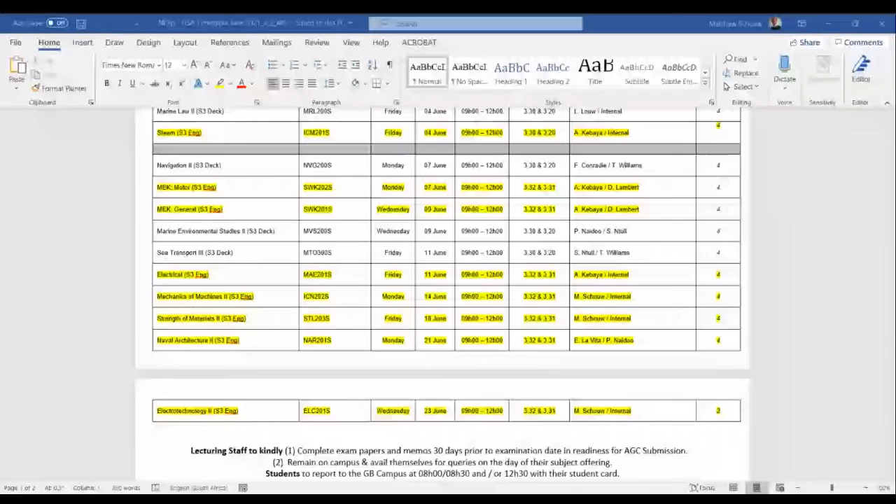Yes, sir, we get that. Prince? Okay. That's that, and then I just need to share my slides for our work today. Where are you? All right, here we go.

Okay, so have you guys been practicing shear force and bending moment diagrams? Have you guys been practicing? You're all writing next week on this chapter. How are you guys finding it? Everyone's still asleep. Should be awake by now.

So the other announcement I want to make, let's quickly scroll to the test day. Where was that test date now? I had to move test 2 to 1 o'clock because I have a subject review meeting with the faculty teaching and learning rep, the main guy, so we'll be discussing this subject. So I had to move it from the morning session to the afternoon session. I think it'll be of benefit because it also gives you time maybe to squeeze in some knowledge before that session. So just note that the new time will be from 1 to 3:30. This will be posted on Blackboard today.

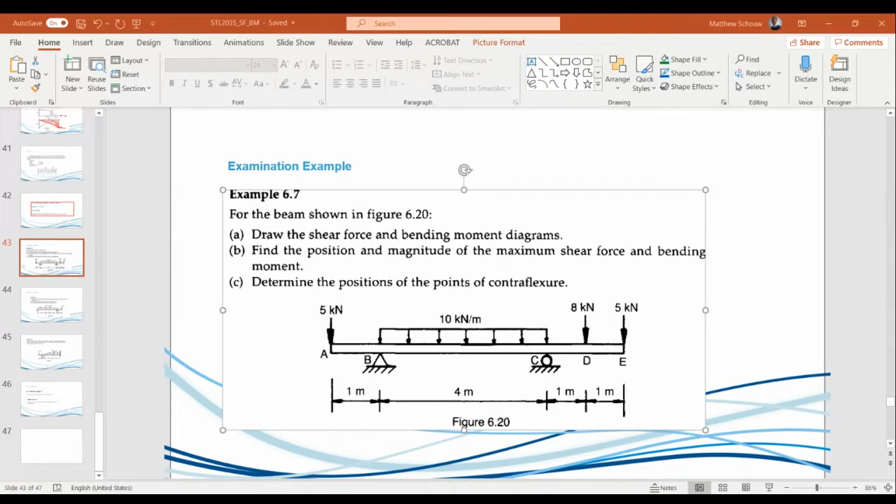We'll first solve this problem, and then I expect you guys to sit and practice. This can be a difficult section but also an easy one, since it literally asks the same stuff all the time. These are big mark questions, so it's easy to score but also easy to lose marks. We can treat this session like a tutorial for shear force and bending moment diagrams, so please participate.

If we have enough time we can do one more, but if not we'll start on trusses. I've given you enough examples to practice from, and you've also got a decent YouTube channel to refer to - I wish it was my own, but hopefully in future. Anyway, first things first, we need to find the reactions.

I'm going to give everyone 3 minutes to find the reactions. Remember, if you mess up the reactions, you essentially ruin the question, so make sure you get them right. Get your pens and books ready, and let's start solving. We might find another one in the meantime, but let's focus on this.

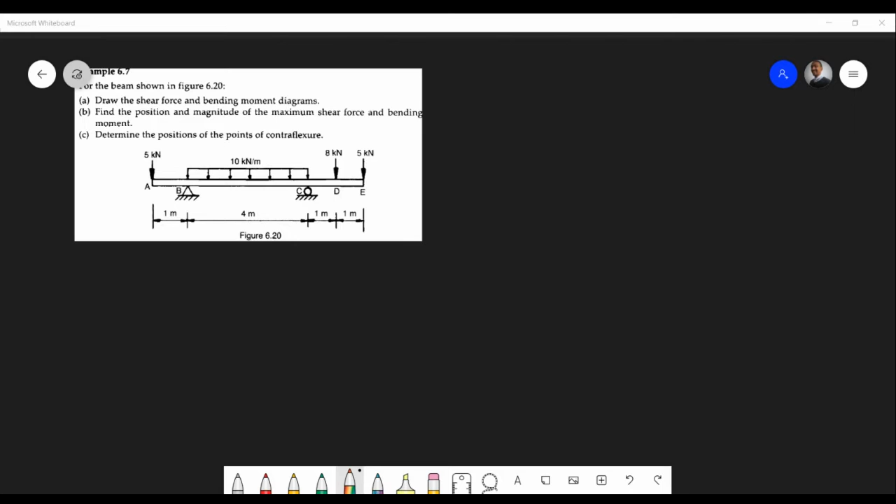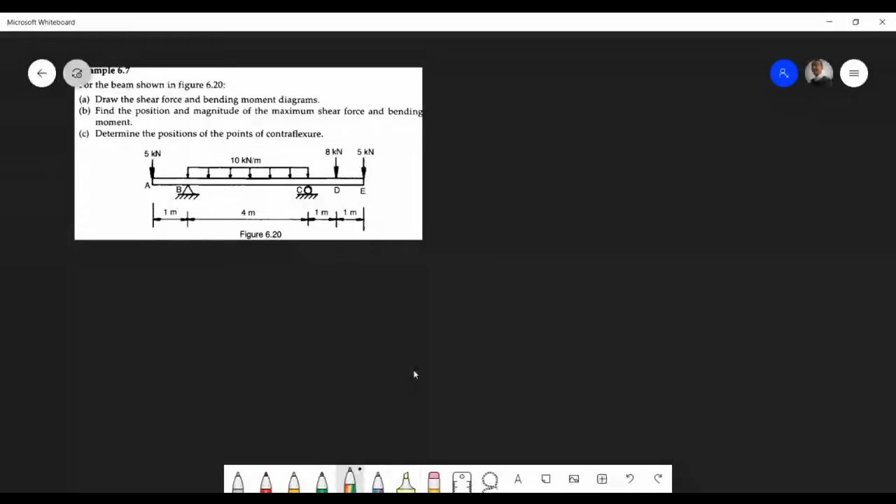Okay, so first thing is first: we treat our UDL as a point load. You can say 10 times 4, that'll be 40 kilonewtons per meter, so that's 40 kilonewtons now.

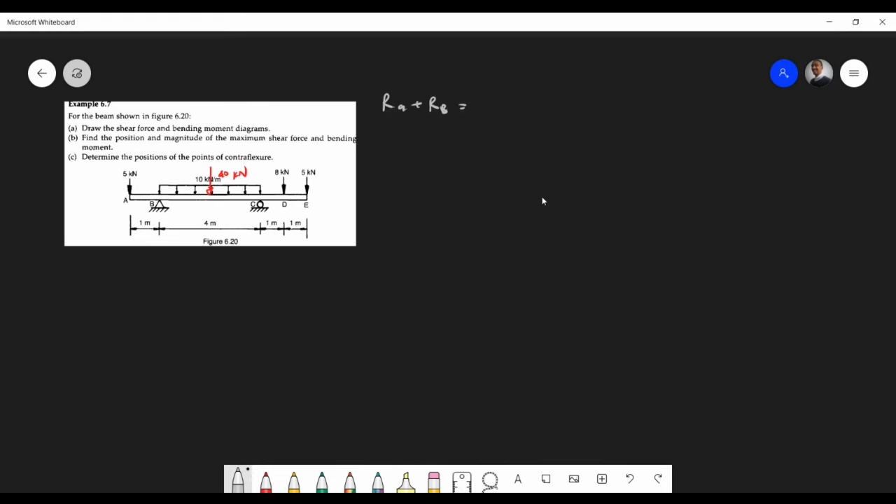Then we can start with our first equilibrium condition. We know, assuming RA and RB are going up, all the vertical components sum to 5 plus 40 plus 8 plus 5. So I'm getting 40.6 and 70.4, let's see, we'll get to that now.

Are you sure that's correct? It doesn't look correct, I'll tell you this: these guys up here, you should get 58 kilonewtons, right? Yep.

So we can take moments on either side, say moments at C, since we're looking for the reaction forces. We know the first force is going anti-clockwise, so it's -5 times 5, plus RB times 4, which is the force over here. This is our load diagram essentially. RB, and of course you have RC.

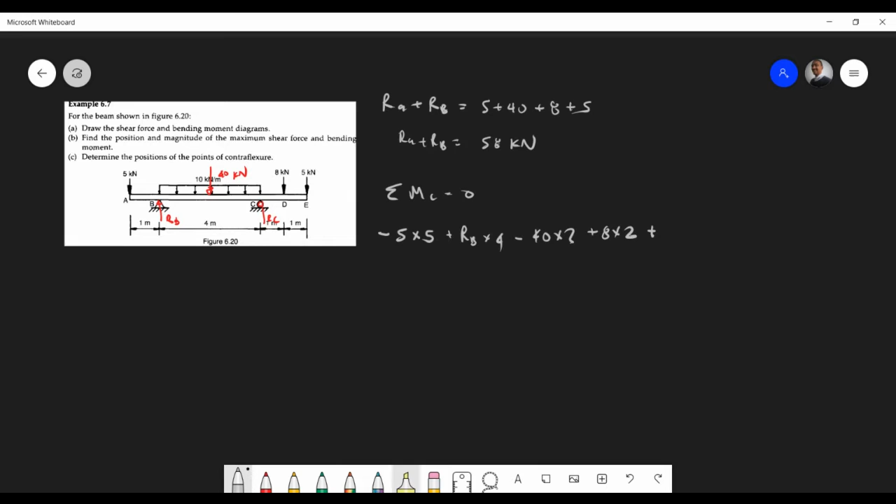Then we have our UDL, which at its center is 2 meters away from C - that's -40 times 2, an anti-clockwise moment. At RC that's 0. Then we have the 2 loads there, going clockwise: 8 times 1, and 5 times 2. That equals 0, all right.

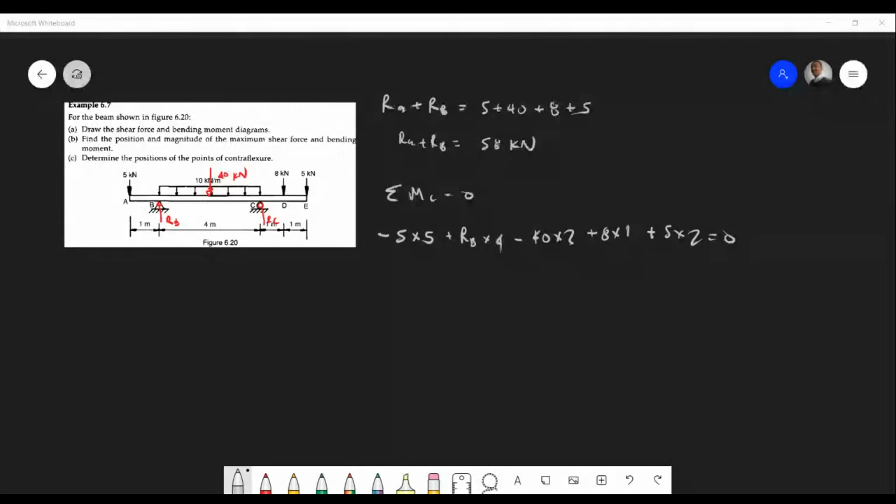Okay, so guys, make sure you get this right. It's very important.

So we can just add up everything there. We know RB times 4, so I'm just going to carry over everything to the other side. That's going to be 25, like in this example in your textbook as well. So 25 plus 80 minus 8 minus 10. Let's just quickly see what we get: 87.

And of course, then divide it by 4. Then I'll get 21.75 kilonewtons. And then the other one will be 36.25. If you use that, therefore RA is going to be 58 minus 21.75, which is going to be 36.25.

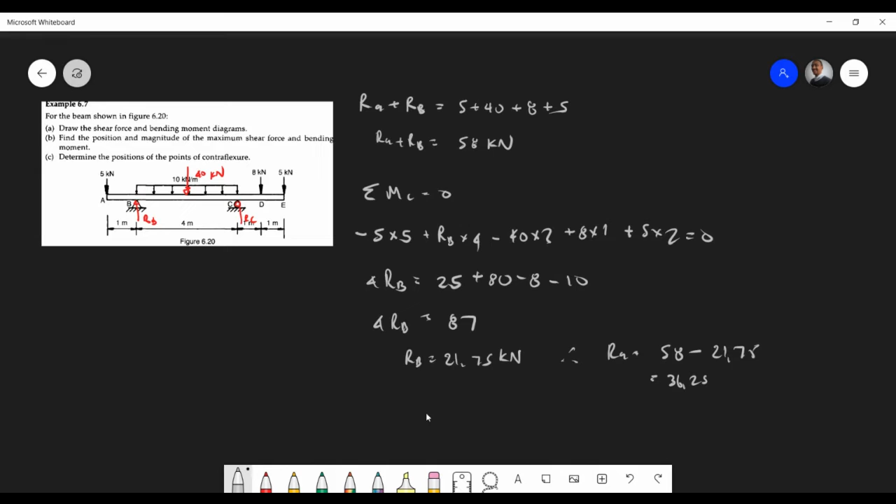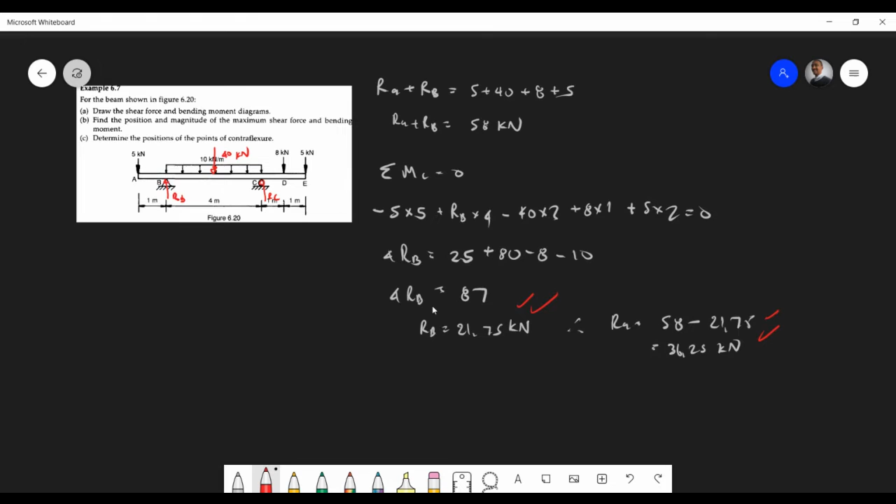Okay, could we all do this? Oh, what's going on here? First important step. You get probably 2 marks here, 2 marks there, or 1 mark each, depending on the nature of the sum. Is everyone comfortable with this? It's very important.

So next step, once we have that, now we can sketch our shear force and bending moment diagrams, right? I think I'll just use white this time around. So you should just draw lines. You can draw your beam and then draw lines again at each point. I'll just have it over here, and that's 0.

So how do we do it? I'm just going step by step, just so that everyone, for the last time, gets a good feel for what's happening. Shear force at A: that's -5 kilonewtons. Shear force at B: it's going to be -5 plus RB, and RB is 21.75. That equals 16.75.

We've got a shear force at C: will be -5, 21.75 plus we've got, of course, now...

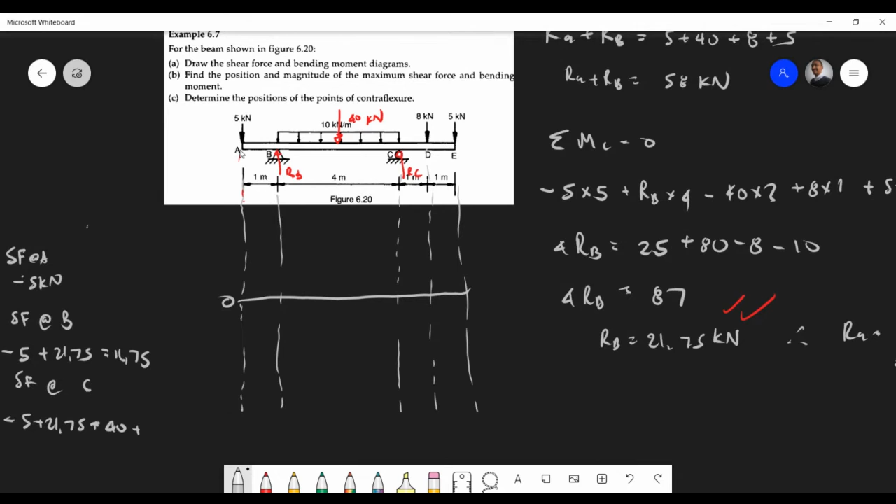And then we go to C, then you get all the forces to the left, and that's essentially all the forces to the left, including the point, which is going to be -5 plus 21.75 plus, sorry, that's -40 in this case. That's -40. And then plus RC, and RC is going to be, what's RC again? I had RA, RC, so just call it RC, sorry. And RC is going to be 36.25.

So just look at me there. Okay, okay, cool, thank you, that's all basically.

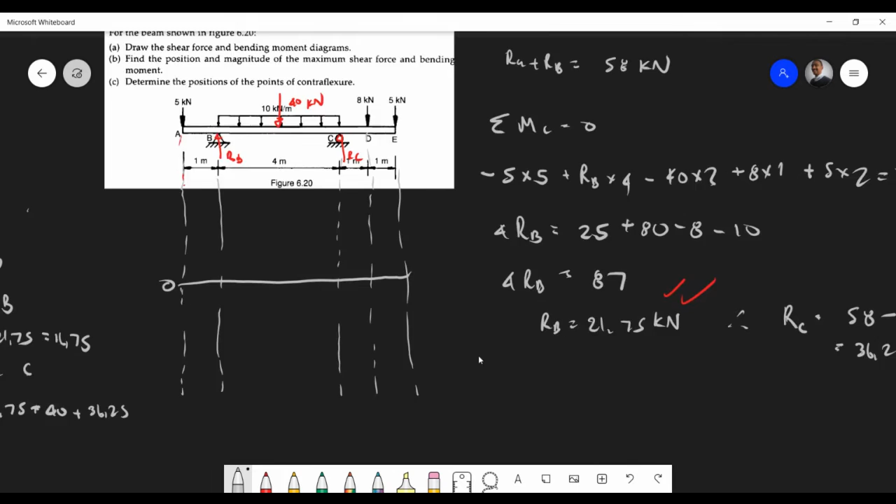You go on D, do exactly the same, and consider all those forces on E. You'll know you're correct with the shear force. For instance, you're going to end up here on 5, and then you're going to end up on 5 on top, and that's going to push it down to 0. That's when you know you're correct, because the beam should be in equilibrium.

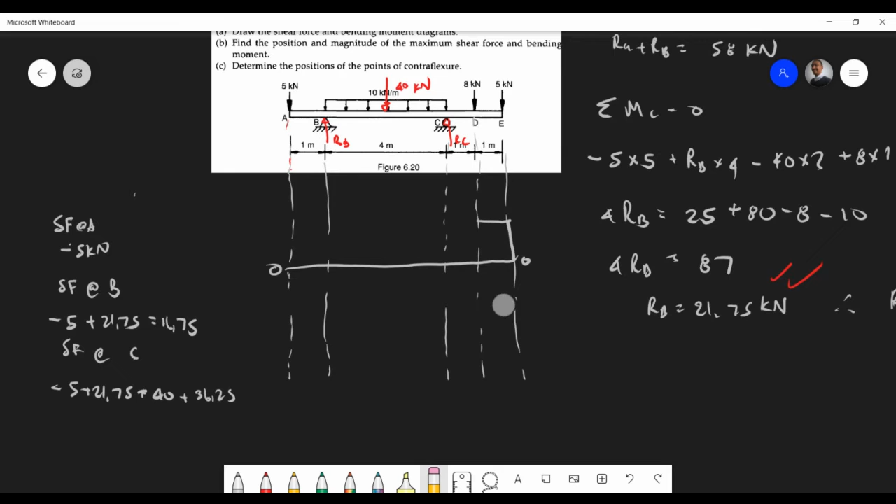We have to be a bit careful when we actually do that. I'll show you now why I'm saying that. And then this is going to be equal to, what's that? C: 40 plus 36.25. 13, let's see, that doesn't look right. Oh, it's -40 there, sorry. Yeah, 13, that's 13.

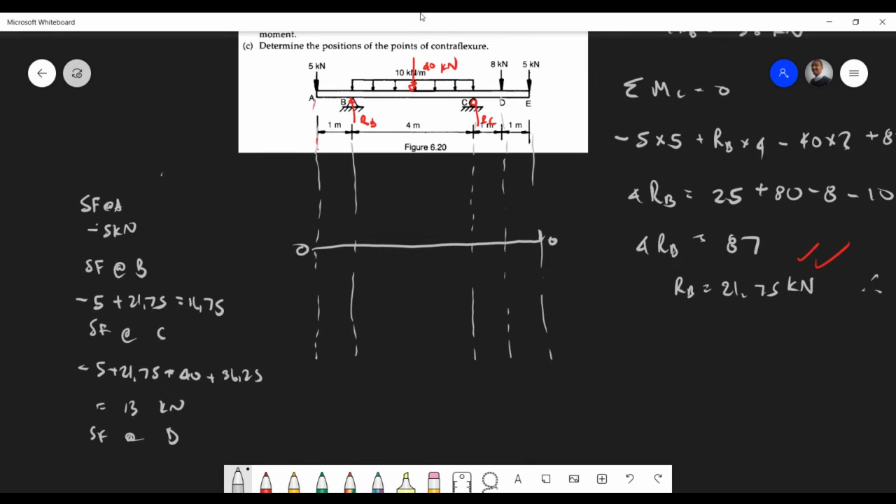Okay, and then at D, I think we just have to subtract 8. We're subtracting 8, we have 5 left. That's correct. You don't have to do this part because it says you can mark the diagram, but it's good if you just do it.

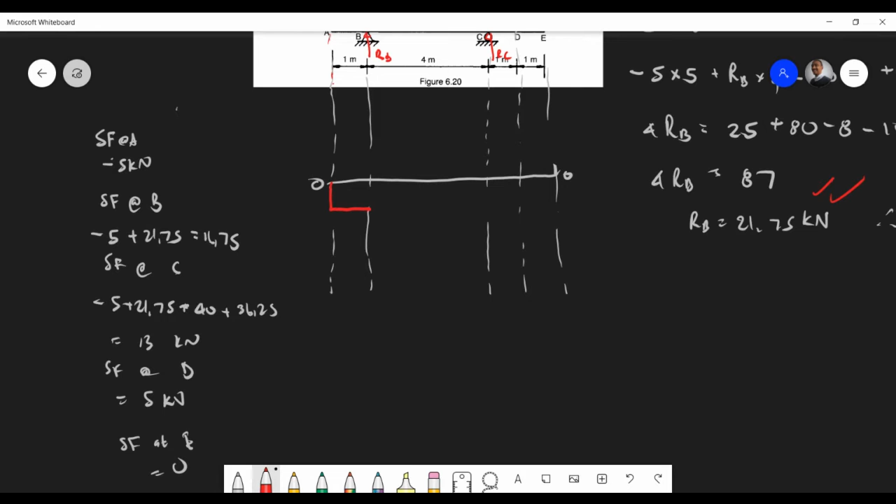And then shear force at E will be 0. So sketching that, at A we're getting -5, right? That stays constant. Then we've been pushed up at B to 16.75. So I'm going up, that's 5, so you can add 5 there. I'm aware it's below 0, so it's a negative line. So that's going to be 16.75.

There's a 13 there. Yeah, it goes up to, let me just get this right. That's -23, yeah, it's -23. Sorry, it's not symmetrical, yeah -23. So that goes down. Well, let me just get this line right. Sorry, just made a mistake here. So it's not symmetrical because we have an extra force pushing it downwards. So that goes like this. Yeah, I just made a mistake there.

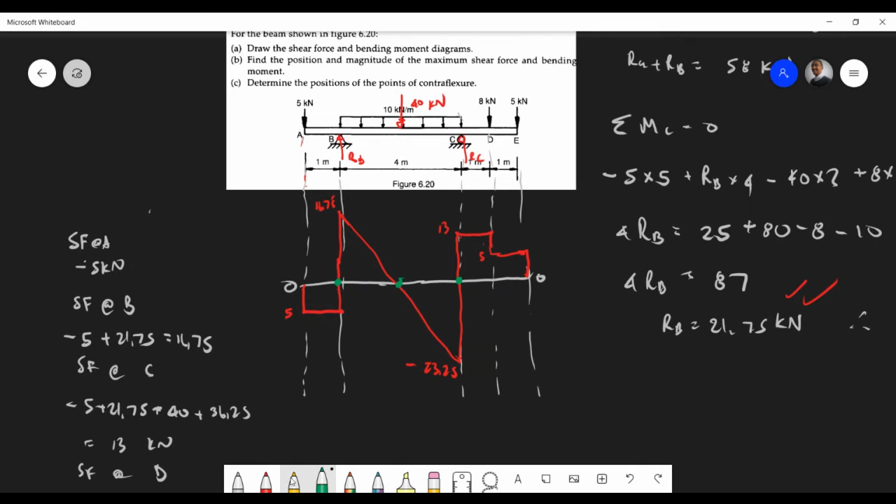Okay. So you're gonna love today's lecture. It's all gonna make sense now. It's all gonna make sense.

Okay, is everyone happy with this diagram? You have to practice, there's no other way to get used to it. It's not difficult, but you've just got to get used to the method. Is there any questions, students? I'll get a few thumbs up before I proceed.

Any questions? Mr. Mzam.

Good morning sir. Morning. Then if, for example, I take any direction here, the diagram is going to be the same, right? So when you say any direction, what do you mean? Like if I take clockwise negative and anti-clockwise positive, the diagram is going to be the same, right? Is that referring to the bending moment, or are you talking about the reactions or the shear force? Because the shear force is very specific.

Okay, I'm talking about when I take moments about, let's say for example, I take moments about B, and then I take the direction for clockwise as positive and anti-clockwise as negative - yeah, it should be the same. When I draw this thing, it should be the same. Okay, so there's no set direction for the reactions when you're drawing this.

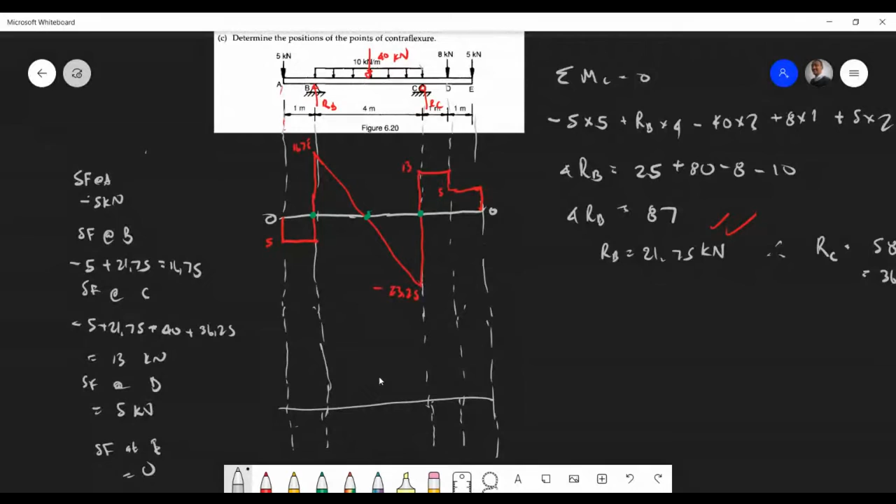Well, there is. I mean, the thing is, if you look at this beam, what this diagram is actually representing is just the shear force counterpart. I think it was Mr. Matasio who posted that video.

Yeah, assuming, let's say - I don't know if you guys all saw that video on the wedding, which I think you did, but it was you, right? And there were people getting on that beam across, and there's obviously water here. There was water here, I think. There was water over here. And these are the people on the beam, right?

So what I'm trying to tell you is that as you load the beam, of course the beam has its own limitation. So it has its own shear stress value, and that's what I actually mean, not shear force. And it has its own maximum shear UTS and maximum allowable - you know, like it's a 355 or whatever, this is maybe god knows what, so 125 megapascals.

To load the beam, two things are happening. The beam's either going to shear, depending on the nature of the beam and the way it's configured, and then also it's going to bend, right? So as I discussed, the beam can fail in different ways.

So what this is telling you is that as this beam is loaded as is, the maximum shear force we're going to experience is 23.25, and assuming this is exceeding - this induces a shear stress greater than the material can handle - it will break at this point.

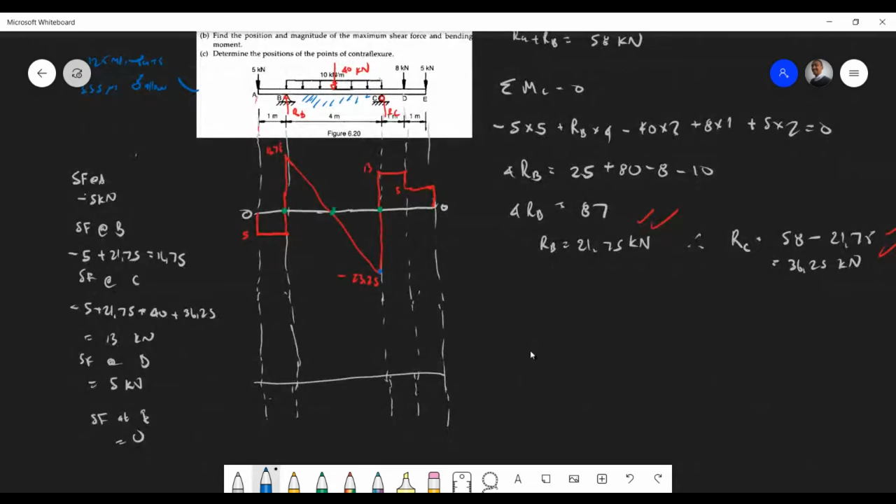I just found out what I was trying to ask. So your reaction is supposed to be upwards here. It can't be any other way because it wouldn't make sense for the reactions to be down. The beam has to be balanced by the two supports.

Oh, okay, but you can take moments either way. What I'm saying is your values must be positive for the reactions. It can't be negative, that's impossible. That's the only thing I mean. You can take different directions, but yeah, otherwise how's the beam standing still?

Yeah, but my reaction here is negative. Like if I take anti-clockwise positive and then clockwise negative. That's what I'm saying, it cannot be negative. Okay, I get what you're saying. We'll see, with the hand up. Okay, thank you.

What is our reaction force at D? There's no reaction force at D. You mean C? At D, D has no reaction force. Anyway, you guys are losing yourself there. There's two reactions, you know what the reaction is, right?

No, I'm talking about the shear force. Oh, shear force at D is 5. Remember, it's 13 constant, and then it gets pushed down by 8, and then it stays 5, and then goes to 0 again.

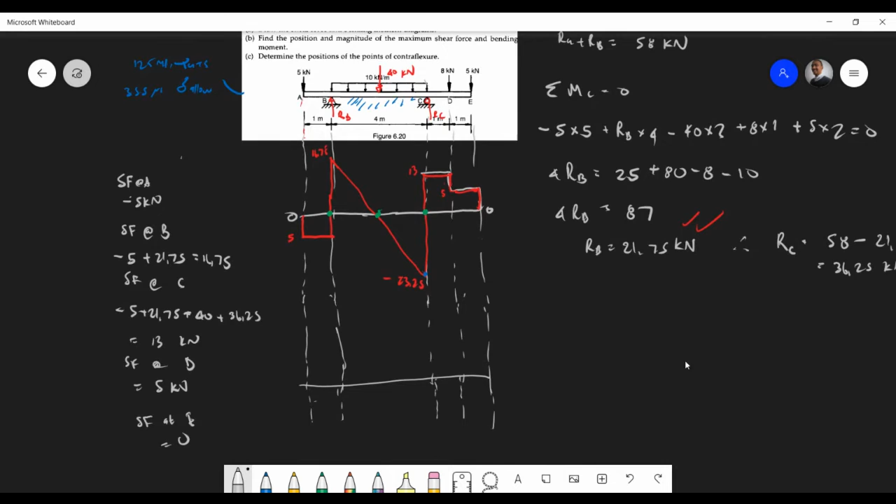Okay, so let's find the moments now at our various sections. That's the next part. Taking moments at A, the sum of moments at A, I would say moments at A. It's always going to be 0 at the start, essentially there's no bending happening there.

Moments at B, so we look at B, we'll only have -5. What is it? -5 there, and -5 times 1 kilonewton meter. Look at C.

C is going to be -5 times 5, RB is 21.75 times 4, and we're looking at 40 times 2. I think that's what that should give me. Okay, so what do we get there?

So moments at D. Moments at E, 0 as well. So can we all get that?

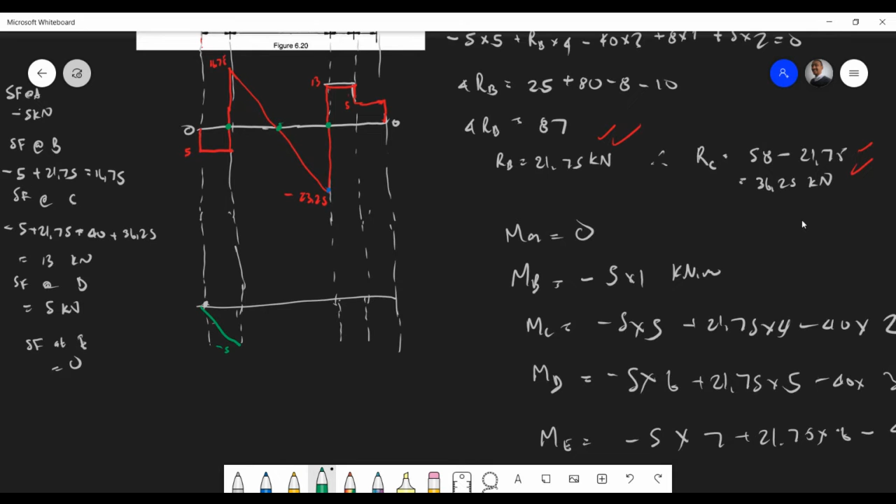Let's just plot that. So remembering our shapes, we're not getting a parabolic shape here, it's a normal straight line. This goes down to -5 over. Let me just use green. That's -5 over there, right? And then we're going up.

Is that negative or positive? Where am I here? Is this bending moment correct here? Have a look - so that's our A, our turning point. A point of contraflexure? No, a turning point on the shear diagram. We have this, the turning point here. I'm not sure what you mean.

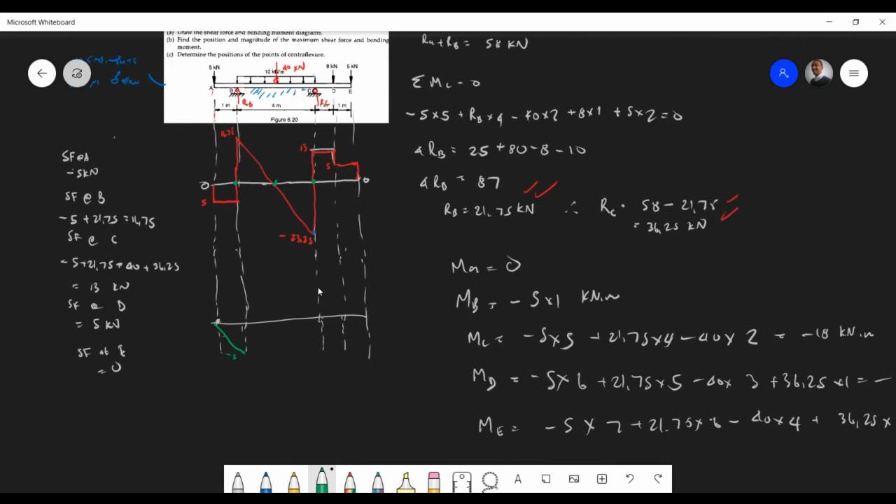Turning points, I mean those points that turn from 0 to positive and positive to negative, the point of contraflexure. Contraflexure is for the bending moments. For the shear force, we call them turning points.

Oh, you mean where the shear force is 0? Yeah, that's correct, these points are the green ones on top. And this point here, for 16.75 to minus 23.25, we draw a line down and take the moment there to be our turning point. Yes, that is correct. Yeah, I'm with you, you're right.

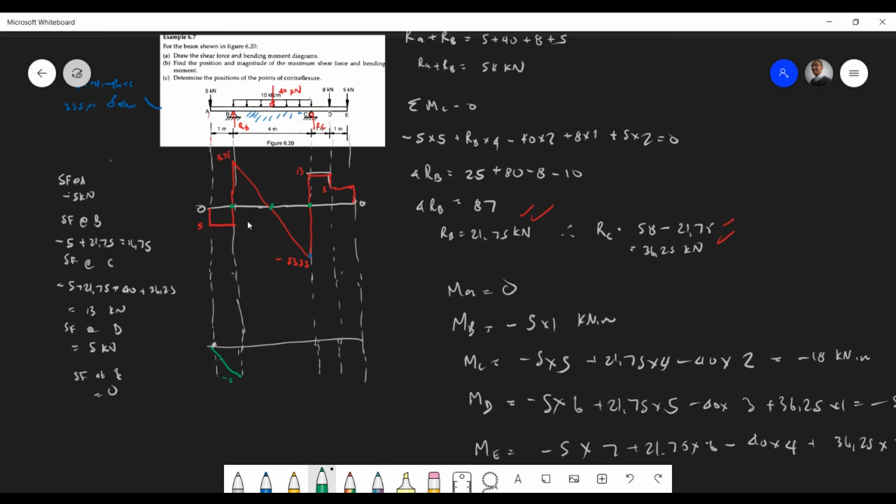Okay, now I'm just using our values here first, just sketching - we're still going to find the dimensions, don't worry. Like this, just give me a second. So MB, and I'm just trying to figure out something here.

And then at C we have minus 18. I'm trying to figure out why my diagram - oh okay, I see. So now when you're hitting a UDL, it goes up like this. Then at C it goes down to negative 18.

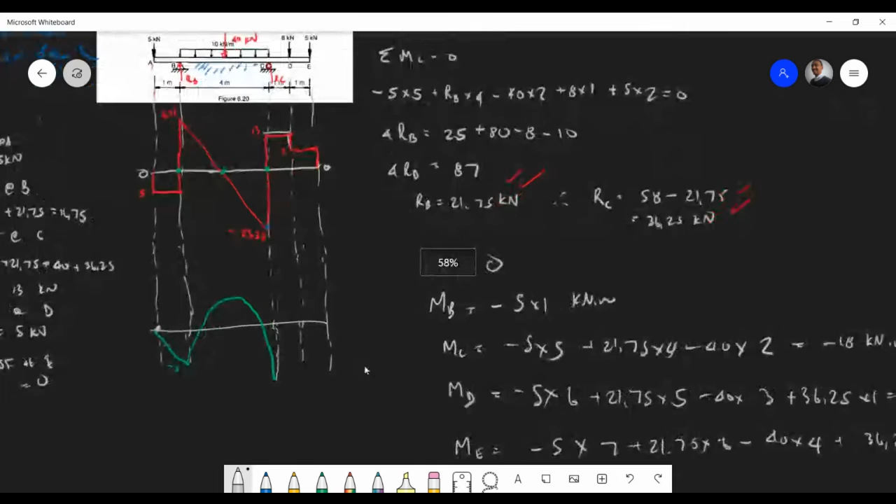Yeah, cool, that's fine. We don't know what this is, remember? So that's just negative 18, I think it zooms up. The diagram is also a bit of a mess, but anyway. So minus 18, and then we add D, and D is going to be minus 5. So it goes up again,

And is there a UDL there? No, it's just a straight line going up, not a curve - just go back. It goes up, and another straight line again, going like that. So that's minus 5 over there.

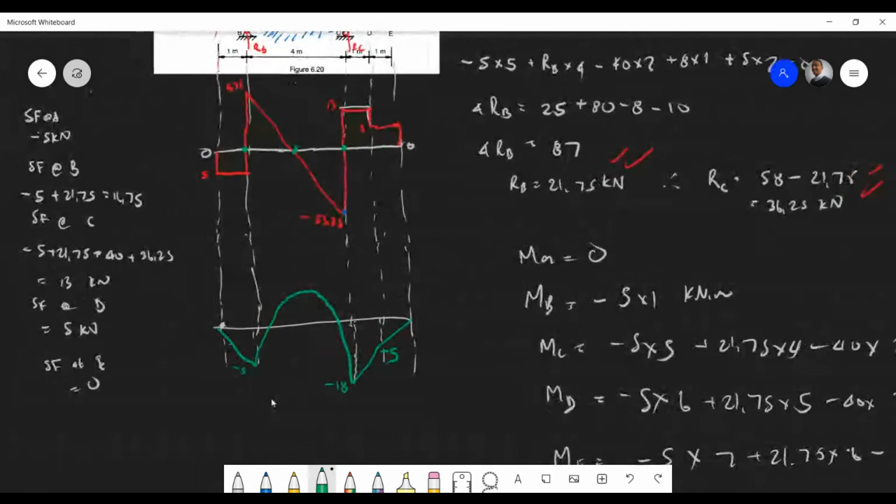Okay, are we all on the same page? This is 0, that's A - sorry, where's A here? Oh man, what am I doing? A, yeah, it's A, B, C, D. Okay, do we all get that?

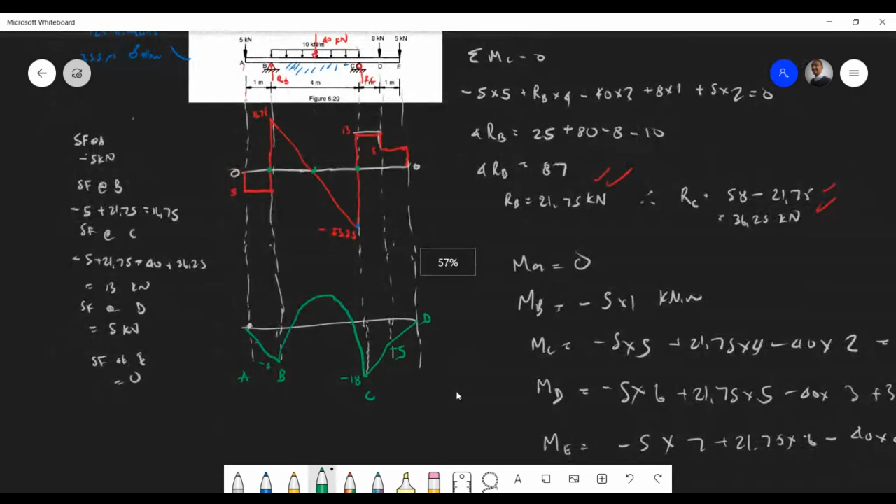No man, D and E. So how do you know it goes like that? Because I drew a negative parabola. A negative parabola, yeah - I'll tell you now why. I'm getting to where Mr...

Okay, so the reason why I know it goes like this, because remember it's a UDL, right? Where this parabolic shape essentially comes from is, if you take the UDL, we just call it W, and then we say W times X, that'll be the distance it's acting upon, and then it's X over 2. W is the UDL per meter times X, the distance the span is on. Anyway, you end up with WX squared over 2. So the idea is that moment itself, if you look at the X squared, it's a parabolic shape. Fine, okay, that's just the shape.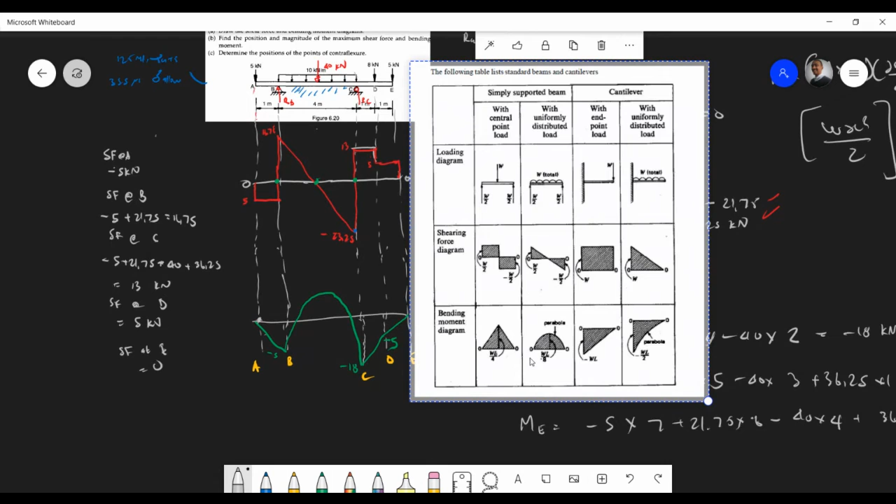Now you're asking me, why is it, you said you drew it as a negative. Remember, if you look at the diagrams I've shown you before, if you know you have a UDL, you're always going to expect this up. It goes up and then goes down. I'll show you now, where is it? Just give me a second. Okay, right? It always looks like that. It's always going to be this parabolic shape going up and then going down. That's always the case. It might not be symmetrical, but it's always going to go up and then go down. That's how you know.

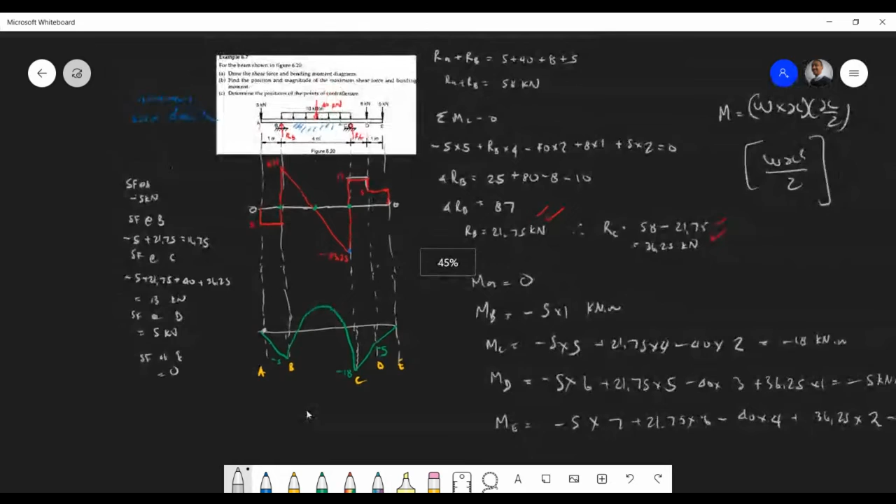What we should do now is, like what Mr. Mataso said, if we want to find the moments at those particular parts. So I might ask a question: what's the bending moment at the points where the shear force is 0? So we know that one is at B, or round about B. No, it's not at B, it's just over B, somewhere here actually. It's not actually lined up here, this is not actually right. And we want to find this moment, because we're assuming that this is the max, but we don't know as of yet. So we need to find what the peak is, right? I did this in the previous example. So can you explain to me how I'm going to do that?

So take our shear force again at that particular point. Now what do we do, tell me? Shear, I'm going to call it X, right? Can I just call it X? Is our X, so we say yeah. Shear force X, go for it, there is a simple way to find this turning point. Similar triangles - no, this one can be similar triangle, but the book says you do this from B: you take the shear force at B and divide by the UDL, you get your point, the distance to B. So 16.75 divided by the UDL 10, yes, it's our distance. So this is going to give us 1.675. Yeah, from B, but from B, right?

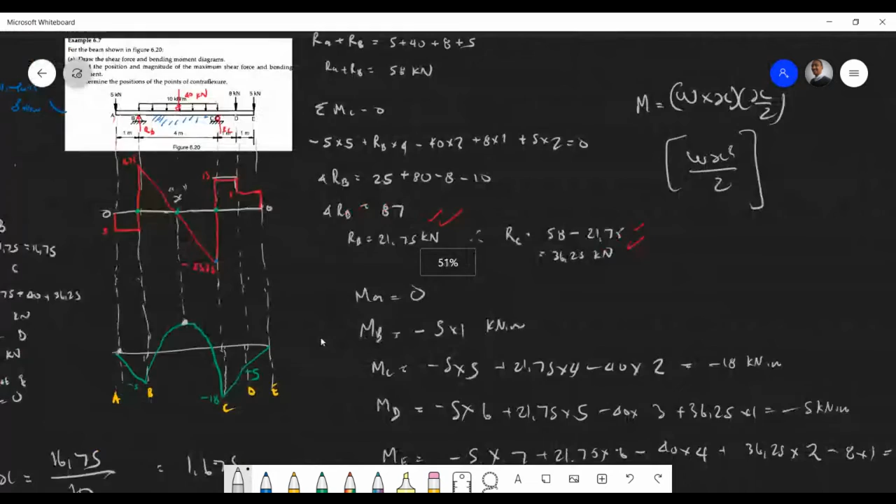Oh, we don't have enough time here anyway. Okay. V max is equal to 23.25 kilonewtons.

Is that C, I think, right? M max is at, where is that? Oh, it's -18 at C as well. It's basically the same, on the inside of the right hand support, and yeah, it's just all vague. But I'll shape this. We'll do it now, I'll show you exactly.

Okay, so students, not to be lost or anything, what we're just doing is to find where this particular point is, right? So what they basically did, look at the textbook, they just found at 2. But what we did, we actually found where the maximum was. So we actually got 9,028. And you'll check this answer, don't worry, I'll show it to you now. Are we all on the same page now?

Yes sir, I also got 9.0. Yeah, it's fine, it's fine. You will enjoy what I have to show you after this, so don't worry. So we're all happy with the students, please do not be lost here. So that was just to find that point.

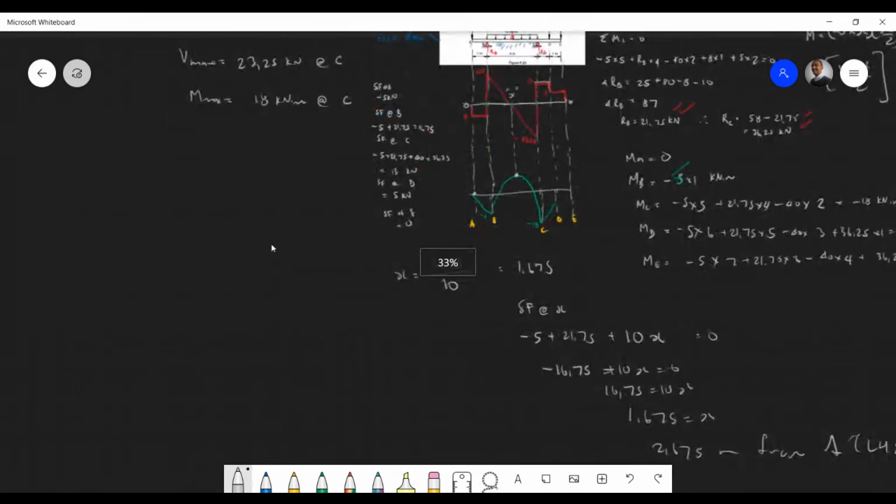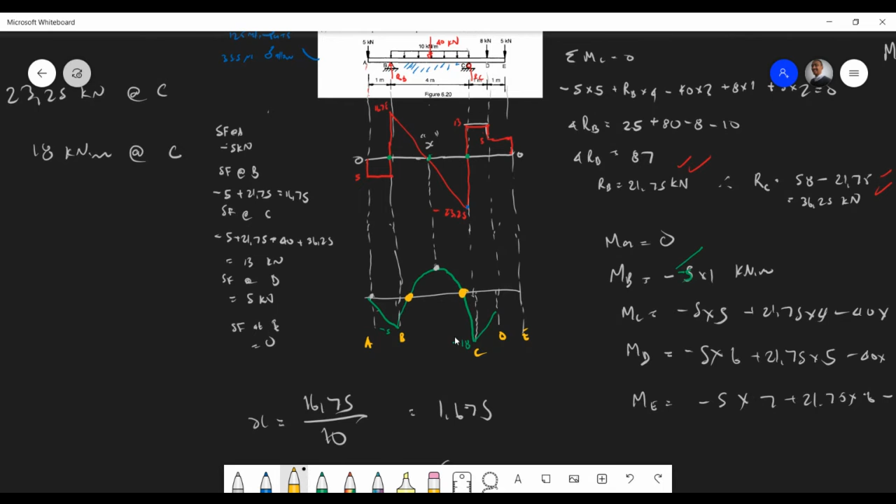Okay, so now the next thing is to find the points of contraflexure. And again, points of contraflexure are where there is no bending moment or no bending stress. Remember this, it might come up somewhere, right? It's when the bending moment changes from negative to positive. In this case, we have one over here and we have one over there, right? So it's very important to note. So normally you might find 2 points of contraflexure, right?

And the way you're going to do it is by taking moments at that particular point, just like we've done over here. So what I want to do is just get my textbook out because I need it. I'm actually going over my allocated time for this assignment anyway.

I'm going to find that I need the diagram here. You're going to have to practice.

Yeah, it does take some time to get used to it. I remember when I started learning this, I had a bit of a headache. But I have something to assist you to make it easy. You can verify your answers.

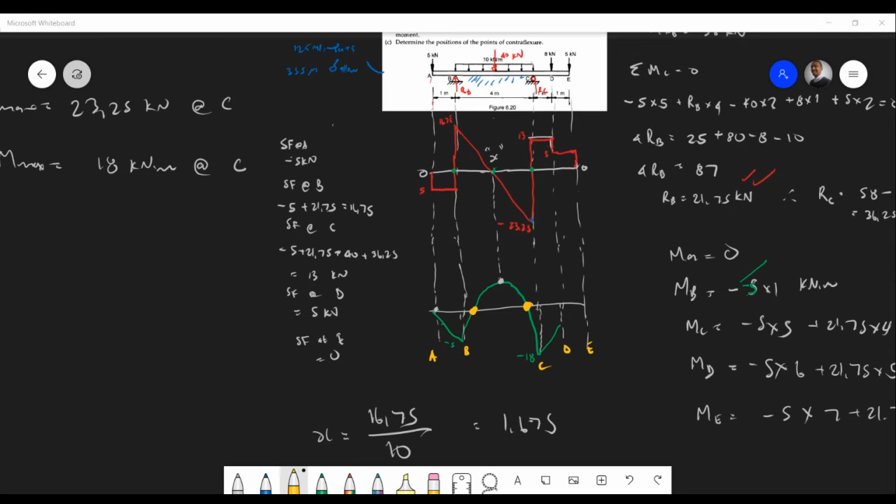All right, okay. So I'm just getting a nice actual diagram so it can look a bit neater. All right, okay.

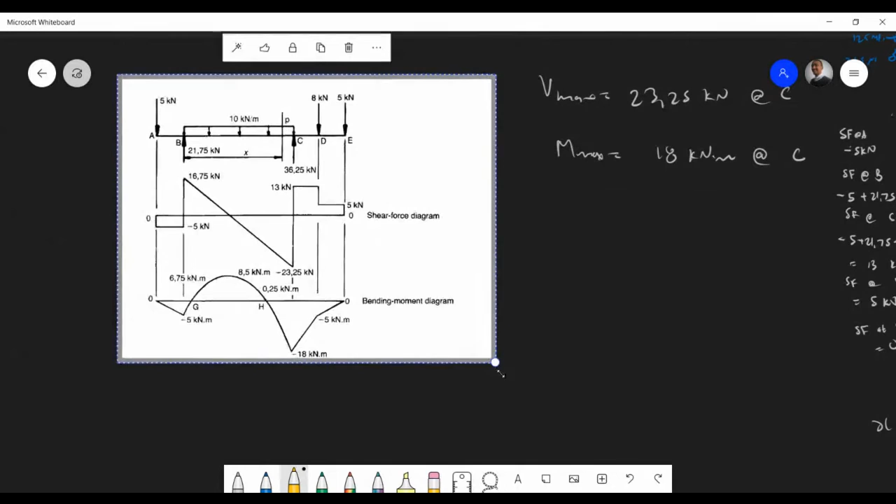So was X 1.675, from A or from B? Yeah, so...

Obviously it has to be from B, right? It has to be there. And because if it's from A... whoa, it's a baby.

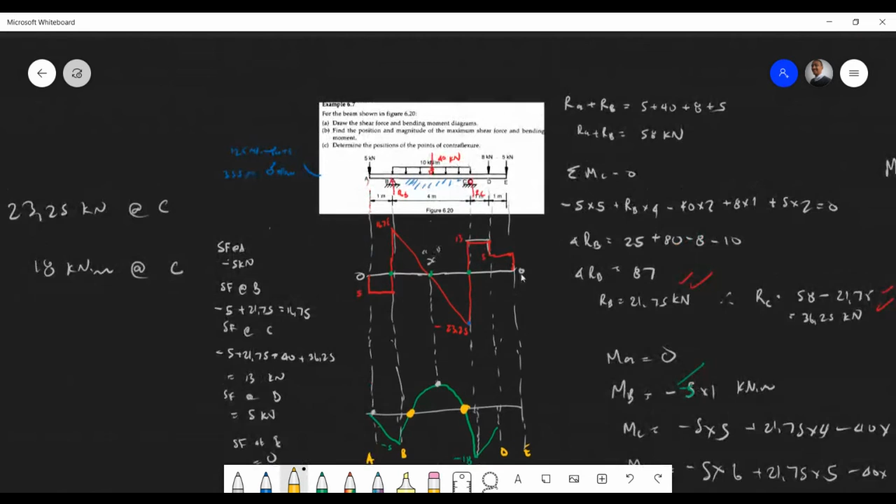What I'm feeling is that it's actually from A. But let's just talk about it, just to figure it out.

We're taking the shear force at that point, right? So from where we're referencing this point - normally when we're taking the shear force points, even in the previous examples...

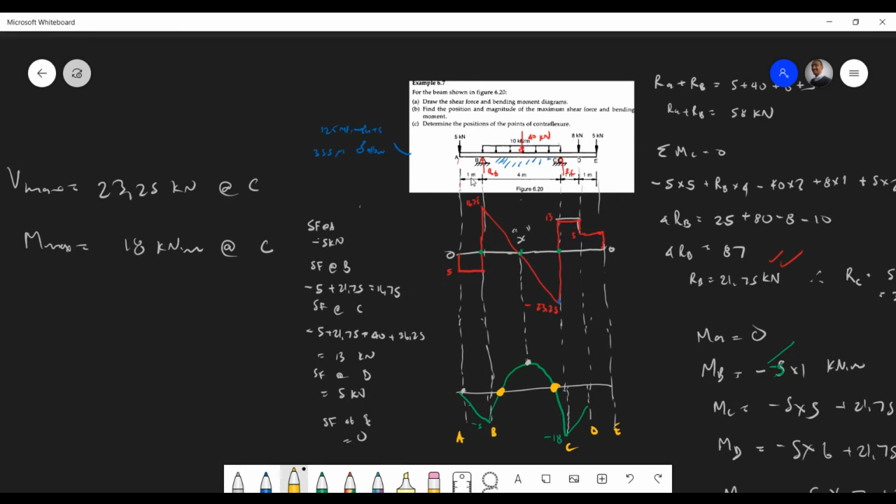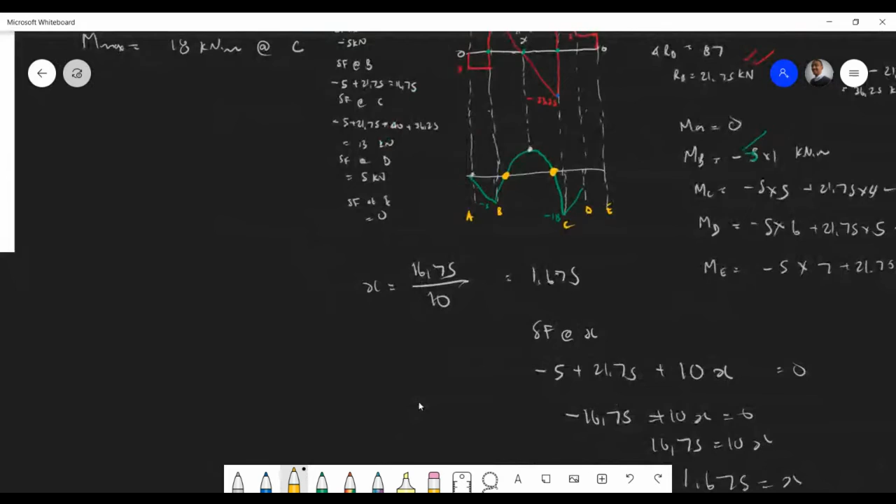We're always taking - if we're taking it here, I'm definitely sure we're adding the one. If you just take the previous examples, it's essentially the same thing. So it's from A, it's not from B. So we get that dimension, but then you have to add the one from the other end, because we're just taking it from that particular point - because remember the UDL is only acting at that particular point.

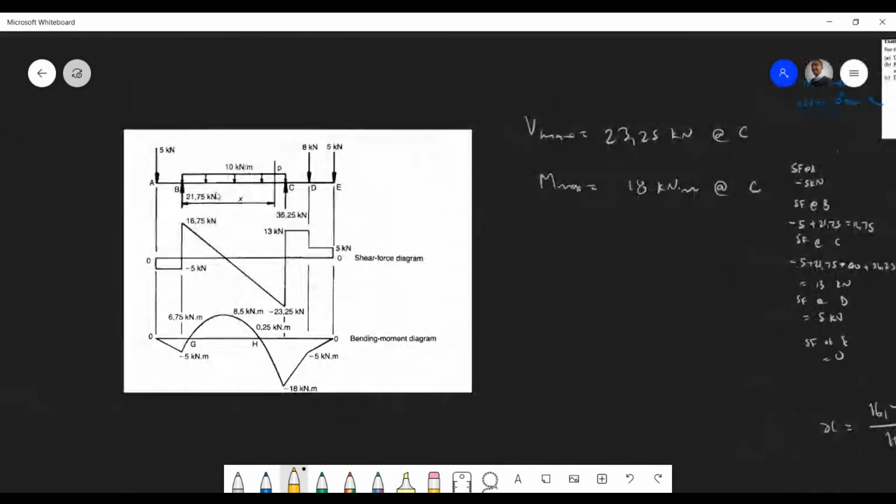But you'll see now, don't worry, it'll all come to light soon. So we're gonna do this, do the software I want to show you, and then we can take a break and start on trusses. So it's a really good sum to actually go through. So students, we're gonna end off with this point of contraflexure for this particular sum.

Okay, so we need to take moments from here, and there's another one over there, right? Cool, okay, so I'm gonna call that moments at G, which they have - you can call it obviously any letter.

And the aim is we find the points of contraflexure. This is where no bending stresses are in the beam, and this is normally where we want to join the beam, so that our joints do not suffer from additional stress.

Okay, so the first force is -5 times - we can call whatever the distance we need to call that. We can call it X, or Y, or we can call it Z. Zoom it in - we can call that Z. Okay, we've got that, I think that's correct.

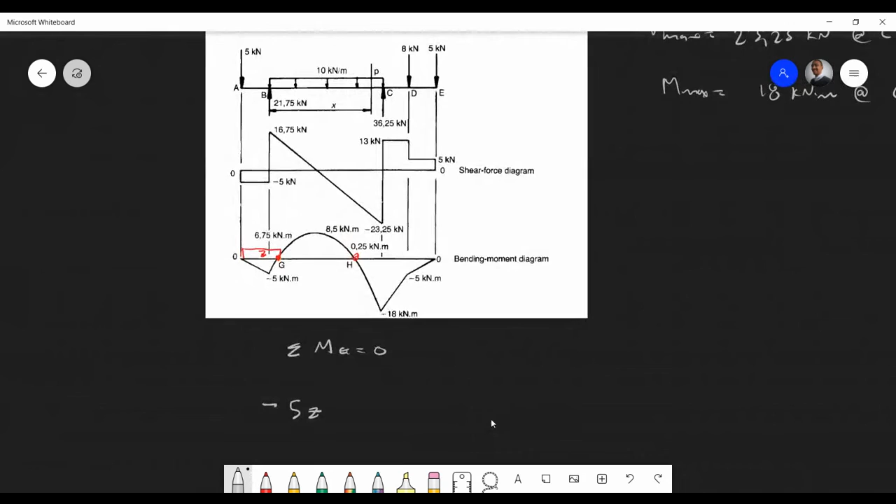And then we have our... what is this one? No, let's get this right. Yeah, then we have plus 21.75, and that's going to be 1 minus Z, which is that small distance over here. That's 1 minus Z, I think. That should be 1 minus Z.

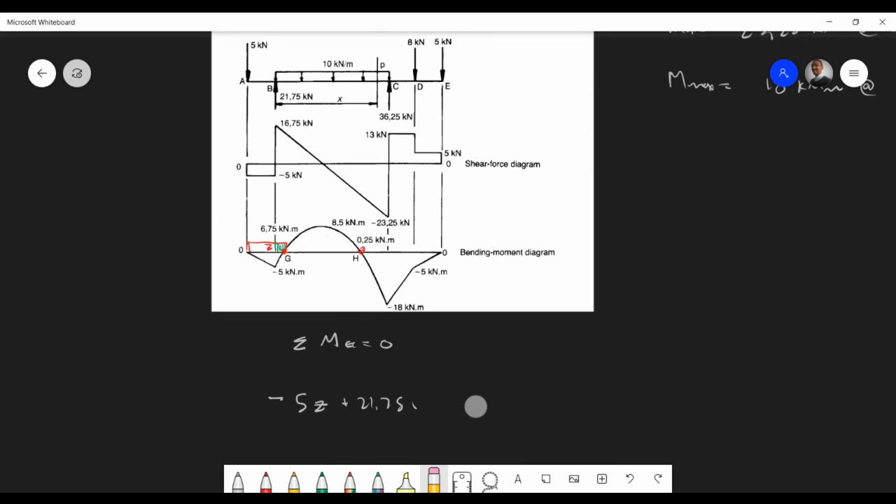I think it's Z minus 1, sir. Z minus 1. Yeah, Z minus 1. Thank you, Z minus 1. Thank you, Phil. Definitely Z minus 1. Z minus 1, yep, that's correct.

And then we have our UDL, which acts only on that small piece there, and that's going to be minus 10 times X - that's the load, and then times X over 2, make that equal to 0. And that's also not X, so it's going to be Z - just forgive me for my bad habits. So that's it, okay, cool.

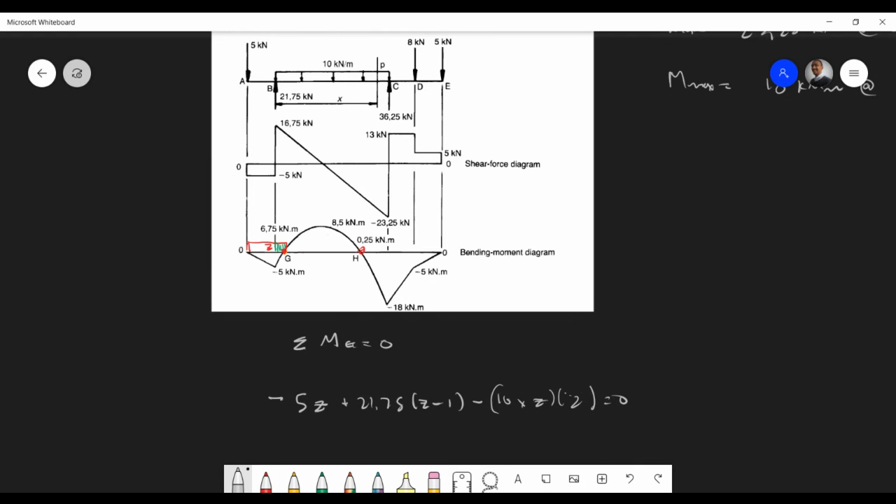Don't know why it's going to be all fun and games just now. So of course we have to simplify this out. If we do that: minus 5Z plus 21.75Z minus 21.75 minus 10 - oh sorry, we can just call it 5Z squared.

So can I ask, why are we using Z instead of X there? Or Z minus 1 there? No reason, we could have used X. No, sorry, I mean like, why are we using Z and not Z minus 1 there?

Is it between the 5 kilonewton point there and G, that's where the UDL starts, is it not? Are you talking about the UDL? Yeah, because the UDL is not the Z point there - it should not be Z minus 1. No, sorry, where's my UDL - my bad.

You're right, it is 10 times Z minus 1. Sorry, it's because I'm thinking of other things, man. Yeah, sorry, no worries. Thank you, yeah, Z minus 1. Yeah, right, and then Z minus 1 - it's because it's becoming messier this way, that's why, over 2, cool.

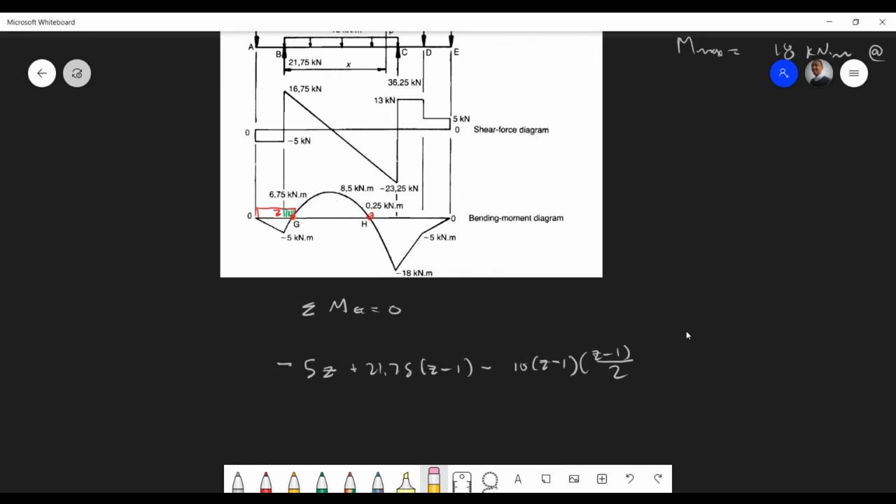Yeah, because I've taken a long way around and I'm realizing, oh flip, it's a big mess. But okay, yeah, so that's definitely correct, yeah, that equals 0, that's correct, yeah.

I should have still taken Z, 1 plus Z, and now I'm sitting with this mess, but anyway, it's fine. So minus 5Z plus 21.75, that minus 21.75Z, and so of course this will be minus 5Z minus 1, squared.

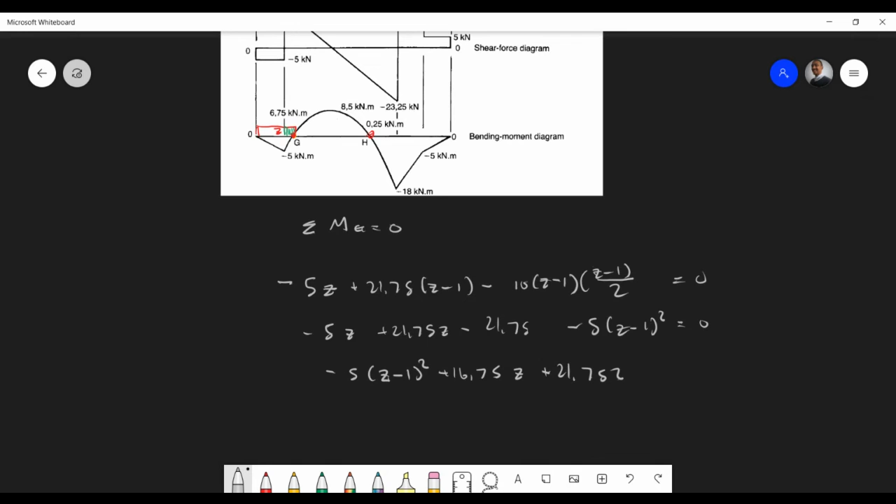Okay, so now obviously we have to expand this thing, we have to kind of expand this whole quadratic thing. I took a long way around, so I'm saying long way around. So you have to expand that, and you can solve it. You can even call this X and then work it out. Yeah, I'm not gonna go that way.

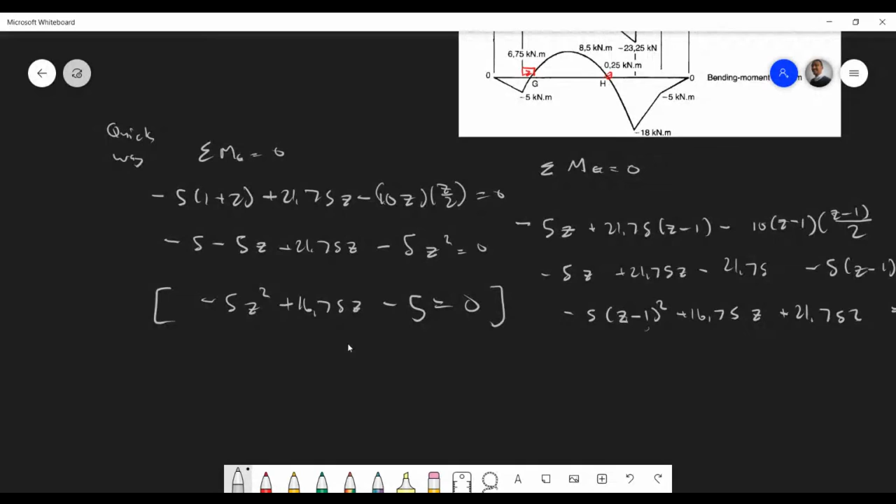Function, and get the roots of that equation. And you should get two roots. Normally one is not worthwhile. So one Z value is going to be 3.018 meters, and one is probably useless or not useless actually. And the other Z value is Z equals 0.3313.

So you can just use a calculator for this, right? Or you can do your good old quadratic equation if you want to be all fancy and whatever. But of course a calculator can do that.

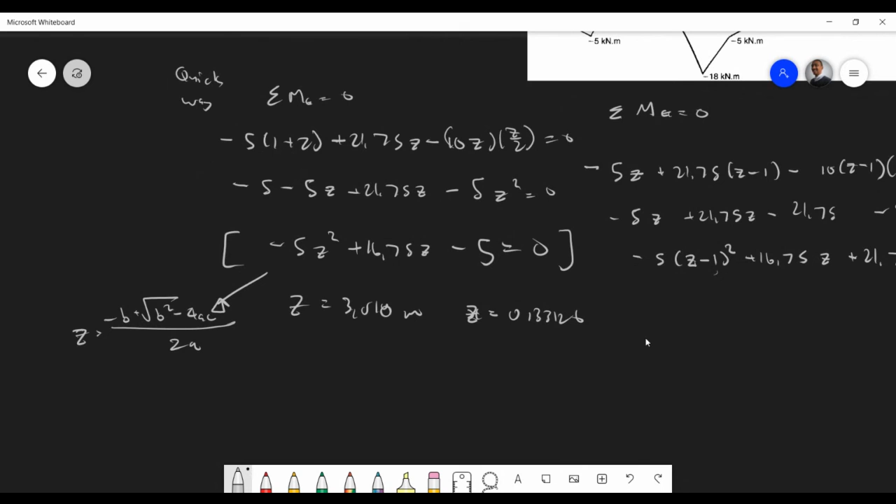So once you get the one value, this is all relative, so this is the Z value we're getting. Remember that's the actual value we're getting. So we have to add, we have to add 1 to both of them essentially. So 1 is going to be...

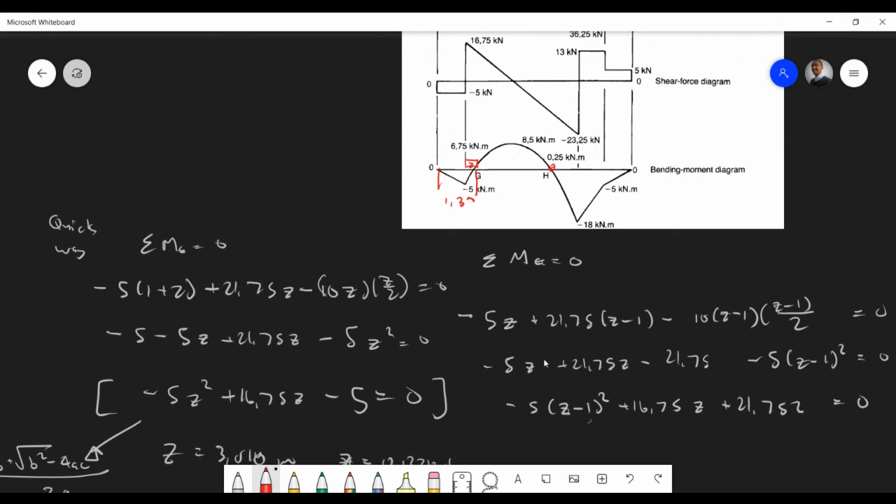It's basically the value over here. So this is 1.33, and then the other one from here, which is that's going to be 1 plus the 3.018, and that's going to be 4.018. So that's that.

And just going further from there till there. You're just lucky both values are positive. Sometimes the values are negative, and therefore you can't actually solve it.

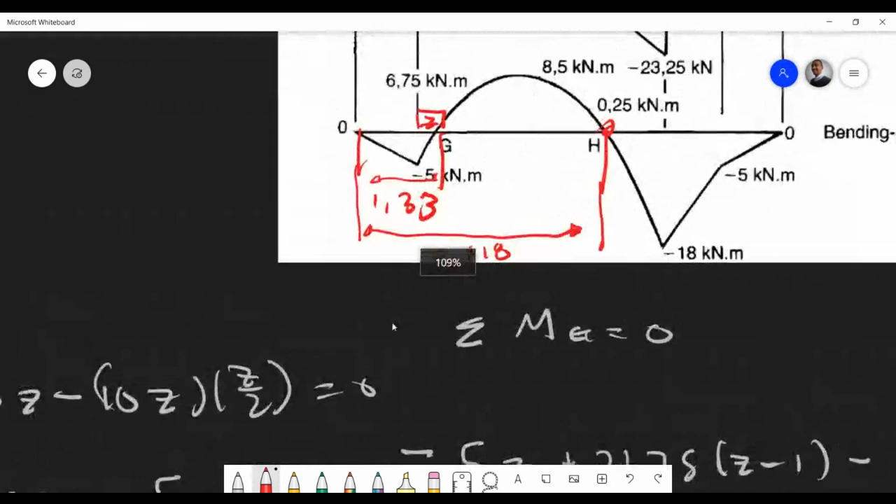So I just want to know, in that first equation, which is minus 5Z plus 21.75 in brackets, minus 1, I just want to know how do you get that Z minus 1 and how you get that Z, like I don't get... Yeah, 100%, just give me a second. No worries, I got you.

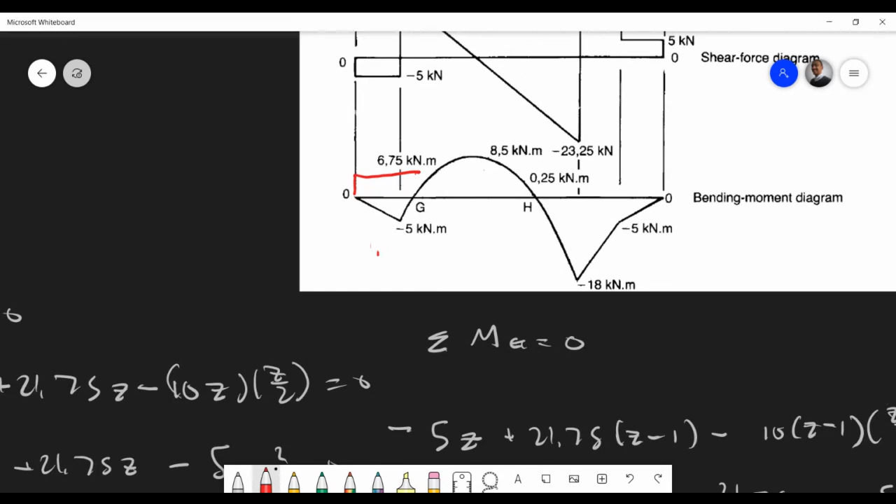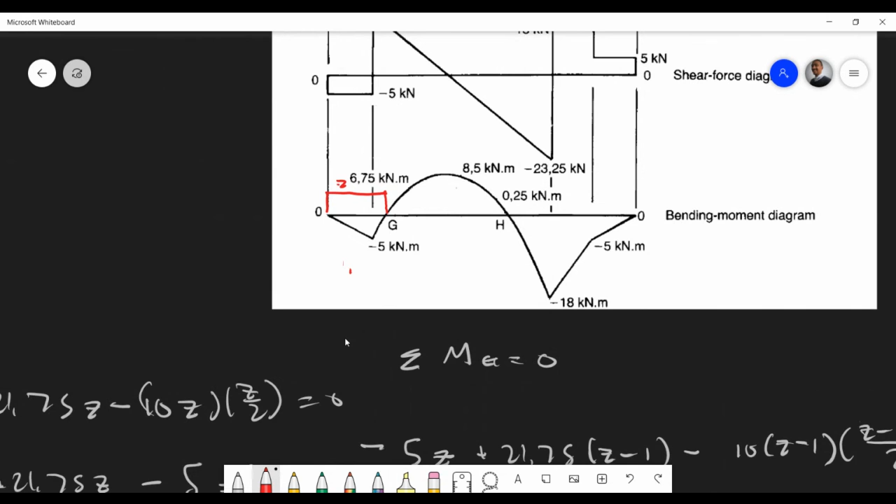So over here, treat this whole distance like as Z, right? From here, the whole distance with them as Z, right? Students, you got that as Z. So of course that first piece there, that is 1, is it not 1? Yes sir, that's from A to B, it's 1, right? Yes sir, that's 1. Does it make sense?

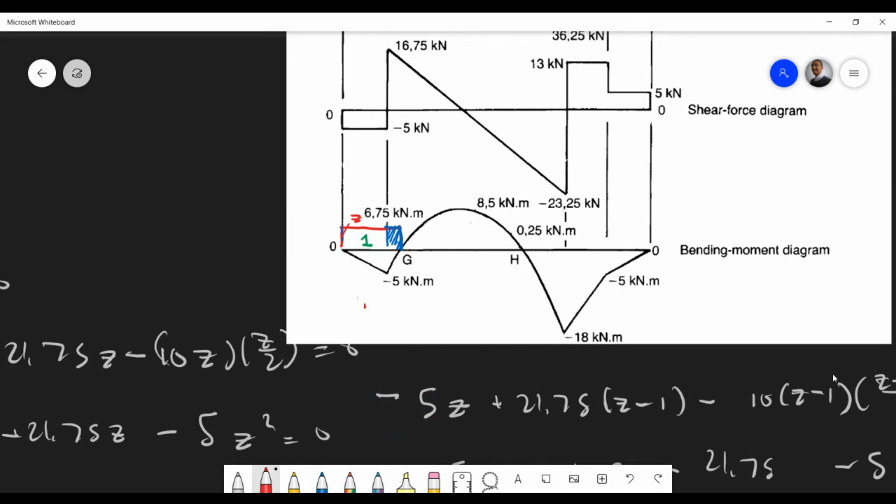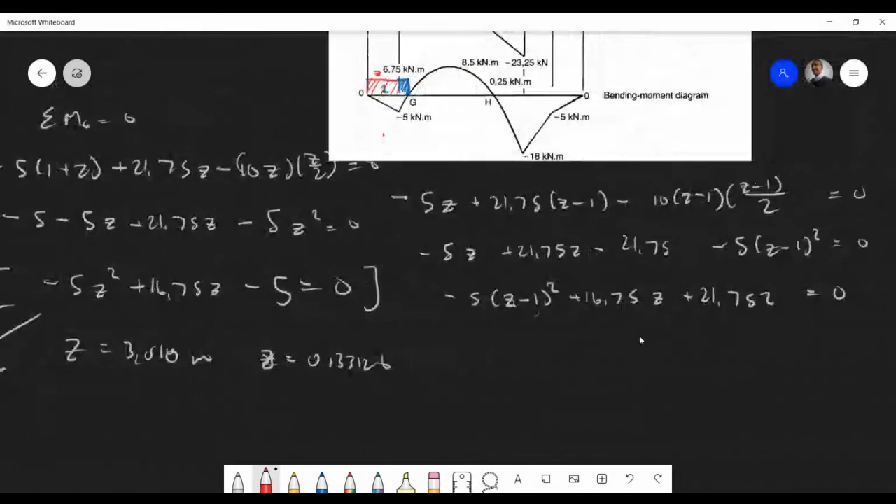Yes sir. So of course for us to get this, there must be Z minus 1 will give us that small piece. Z, if you want to find that small piece here, which we want, no? Oh okay, Z minus 1, yeah. But like I said, it works better if you're just gonna go this way, like 1 plus Z, it's gonna be easier to get to the quadratic equation. Yeah, we can still do it, but then now we're gonna have to call this another thing. Now we're gonna say let Z minus 1, I don't know, be X, and you can try to solve it and then readjust the values. I'm sure we can do it that way, but mathematically it's gonna give you a headache.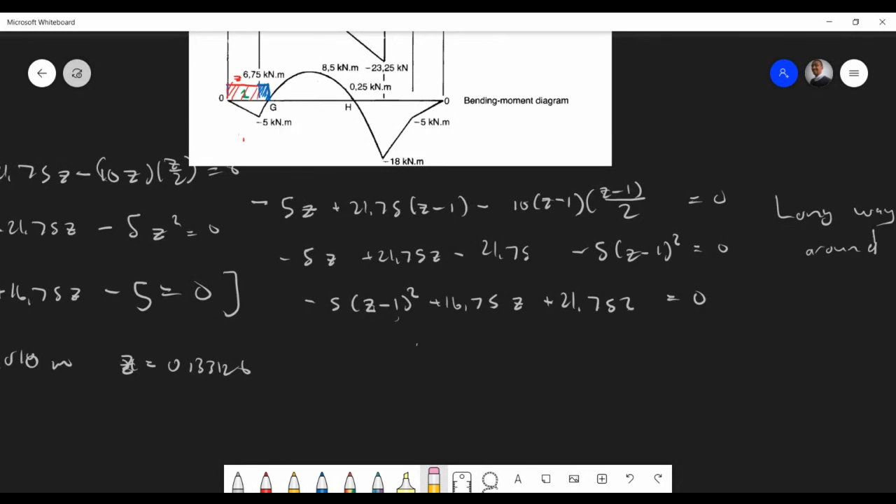Can you please explain the term with the UDL, the 10Z? Is it 10Z or is it 10Z minus 1? Oh okay, so remember now...

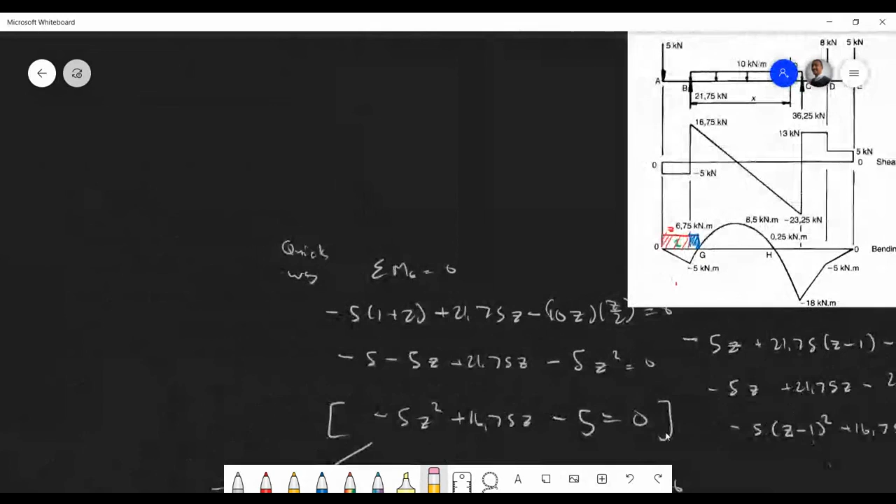At this particular piece here, right? We don't know the distance, this X, that piece there, right? So, or 10Z, whatever, let's call it Z, fine. As we had, just going to sketch, I know it sounds like I'm going over here, but I'm not actually.

So the first part is, was it acting downwards is negative, right? We know it's acting downwards. Then we say 10 times Z, which is the force counterpart. Remember it's force times distance, so this is the force. So it's 10 times Z, normally say 10 times our distance. In this case our distance is Z. Now, a UDL acts halfway between the distance, so Z divided by 2. You got it now, that's where it came from, that's why it's like that.

Are you there? To get it?

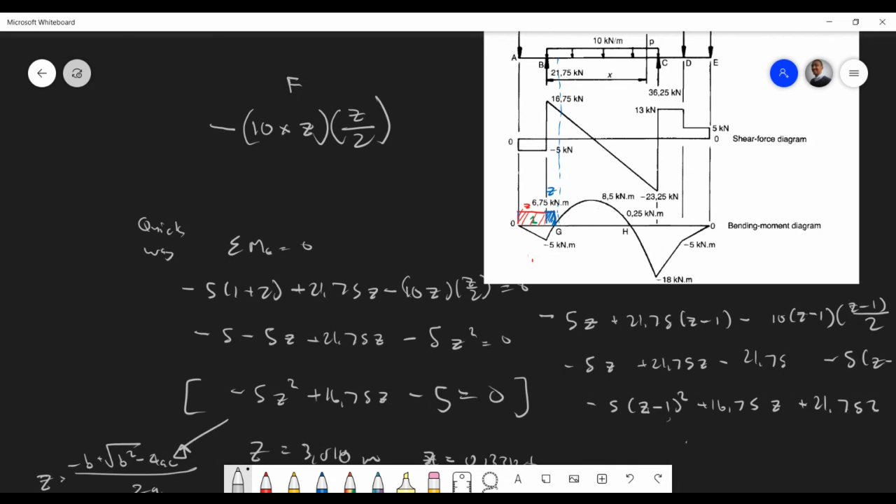So 10 times Z is the force, like 10 times 4, right? But then you still need to know the moment. In the moment, it's actually halfway between. Yeah, that's the idea there.

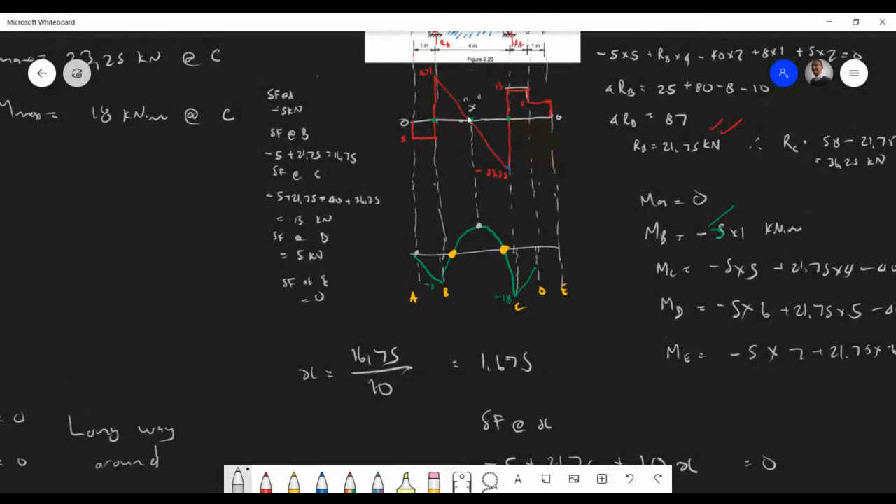But with the shear force side, obviously we don't do that because with shear force we're not looking at the moments here, we're just taking the forces. So just 10 times X. So when you come to the bending moment diagram, you always have to multiply by distance, which is probably X over 2 or X, whatever, for UDL, or Z in this case.

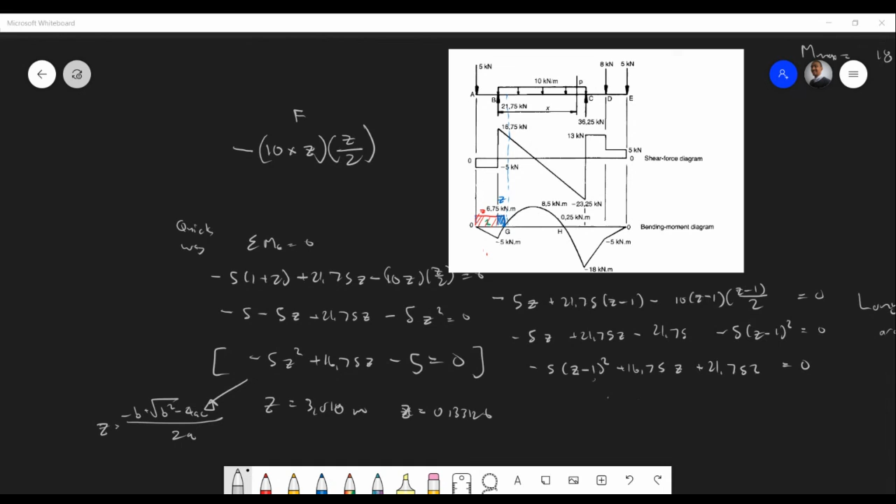So let me quickly do that share now. Where is it, share? It's very easy to use, you just have to figure it out. You can always ask me via... what is this thing called now... WhatsApp. So that's DSNWinbeam, right? I'll share the link with you.

So what I'm going to do here is sketch the beam in question and see if all our values are corresponding. First thing we do is define your units, SI units and so forth, your beam element. Our length is a total of 7 meters. We choose elastic modulus, you can choose any one. In your case, your I-section, you can select an I section. These values you can select anything for this level, it's important for the deflection. We click OK. Next thing we do is check the supports.

There's a point load at the end of the beam, so that's at 0 meters, at -5. I want to blow you guys' minds here: we have a pin support right at B, and that is at 1 meter away. Beautiful, you see that? Can you see my shear force bending moment diagram? Are you guys all there?

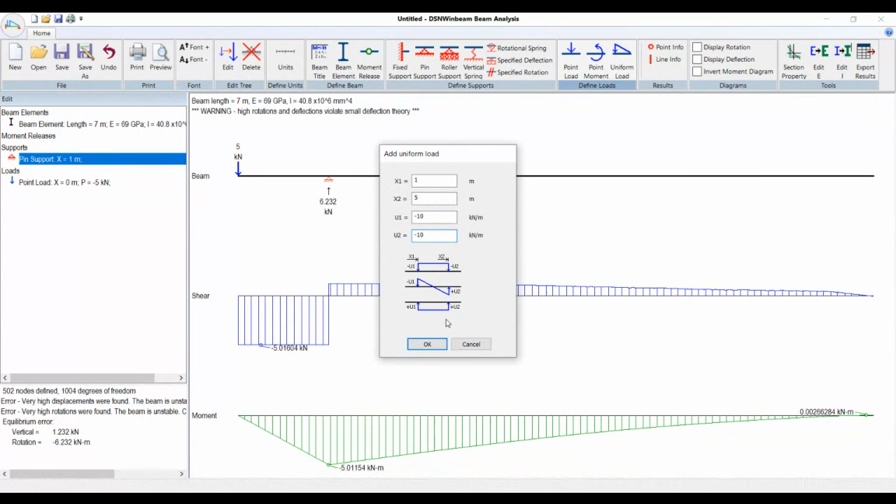What's next? Got a UDL, so you go for uniform load, click on there. You guys are doing this. It starts at 1 and ends at 5, I think. And then you can say -10, and the reason I say minus is to show the direction, going down or going up. Obviously you can have a UDL going up as well. Wow, look at that, that's very interesting. Look at that shear force minimum.

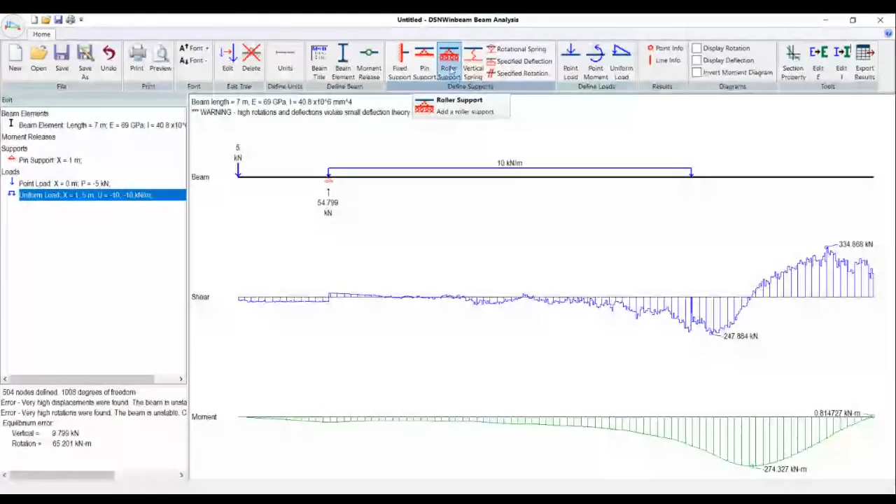And then you can put the support at C, which is a roller support. Now bear in mind, you can put your supports before or afterwards, it makes no difference. That support is at 5, I think. There you go, that looks good. It's starting to look familiar, Mr. Hermanus, Mr. Mataso. It's looking familiar, it's looking good. I wonder what's going through, guys. Oh, Mr. So is also here, Silas, also mornings. And then what do we do now?

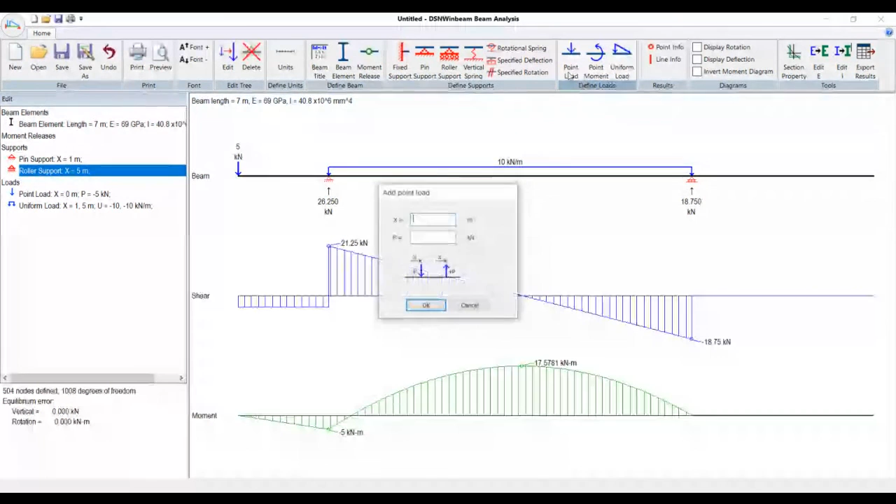We say point load again, 6 meters away from the end, -8. Hey, getting better. And then again -5 at the end, so the 7 meter beam, -5. And what are we going to get? Bam! Does it look familiar? Look at that value there, you see that 9.0281?

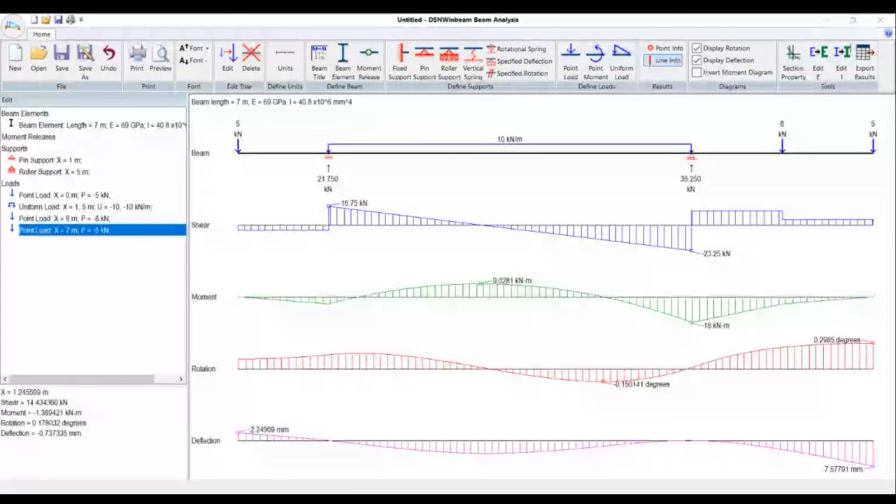Can you guys see it actually? Can you guys see the deflection curve? I can see it, but I'm not sure what I'm looking at though.

That's the shape of how the beam will deflect, that's how it will look like. Oh, that's the shape of how the beam will actually look. Oh okay, I see. Yes, you can see it's very small, like 2.25 millimeters going upwards.

I can't tell you the peak there, but I can obviously check for you with the UDL, and then it'll deflect a lot more at the end. 7.57791, you check there. At the end, the overhang will deflect around 7 mil for the setup.

Do you guys notice, right, where the maximum bending moment is? You see there? Do you see where the max bending moments are? Is it the max bending moments?

Anyway, so the software, DSNWinbeam, is free. Play around with it, use it to check your work.

So what do you guys think of this before I end this part of the session? It's very cool, think it's gonna help you? Yeah, cool, thank you program.

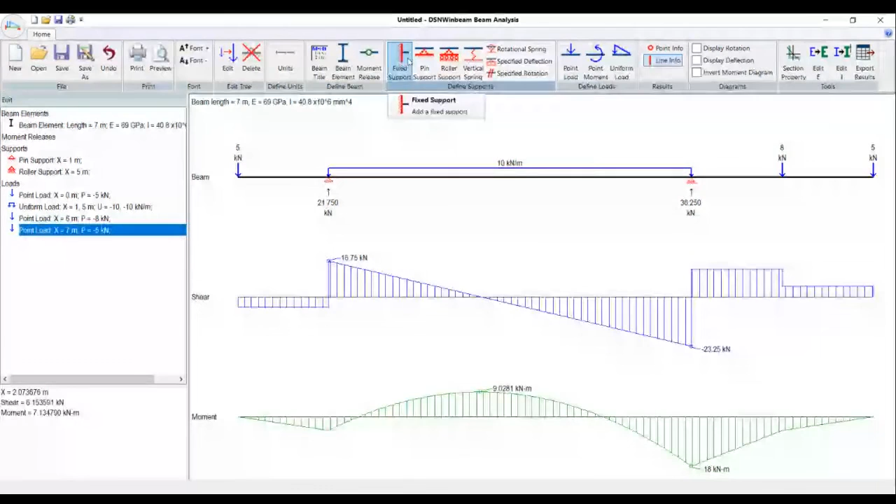Let's hear some other opinions. Mr. Marat, what do you think about that? We're not going to say anything as usual. Grandson, Zam, what do you think about it? Think it's going to help?

Yeah, it's all good, great. Mr. Zuma.

So guys, my approach is that you attempt the shear force and bending moment diagrams by hand. Of course you test it, and then you can always just use the software, play around with it to verify if the diagrams are correct or not. And if you have any questions, obviously you can always just let me know.

And then yeah, so I'd like to conclude this part of the shear force and bending moment chapter 6. I wish you success for this preparation. At least you have some kind of guide on how the diagrams will look like, but you have to practice. I mean, I will have so much time to get you up to speed.